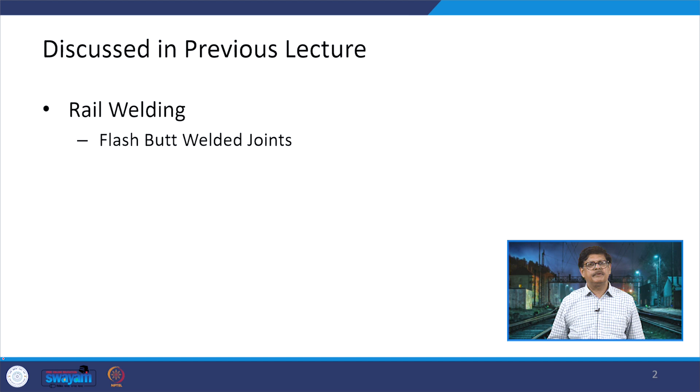Today when taking up the short welded rails, the points we are going to discuss are: components, the laying of SWR, gap survey which needs to be done, what type of maintenance is required, and what are the do's and don'ts when working with SWR for the staff taking care of these tracks.

Starting with the short welded rails. Short welded rail is a combination of 3 rails, welded together, which become 39 meters long. This is for broad gauge, considering a rail length of 13 meters.

So these 3 lengths which are used are welded together at these gaps, and that is how our SWR will be formed.

This SWR contracts and expands throughout its length. As soon as there is a temperature difference, whether positive or negative, it will cause expansion or contraction of this SWR track, and this happens between the joint placed here and the joint placed here. This joint can even be a fish plated joint, but when talking about this SWR, which is 3 panels taken together, all of this length is going to either expand or contract.

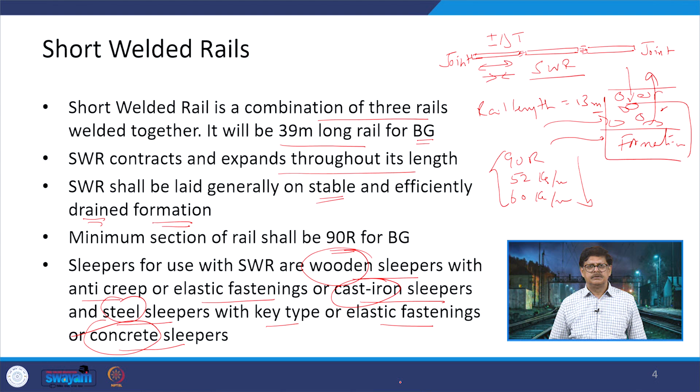But when using these particular sleepers, we need to be careful about the types of fastenings required to connect the rail with the sleeper. There can be some specific fastenings required, but the elastic fastening is one word which keeps repeating. These elastic fastenings have been used by Indian Railways for maybe 10 or 20 years now.

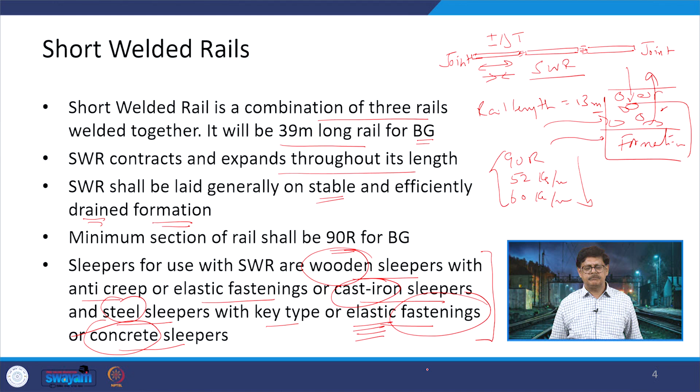So there is an applicability of SWR with different types of sleepers, and along with sleepers you have to find out what type of fastening has to be used.

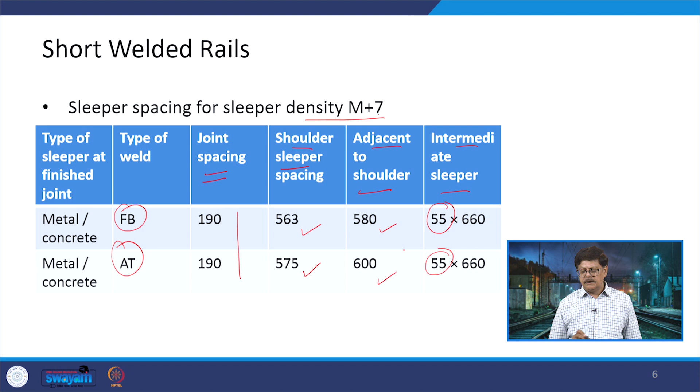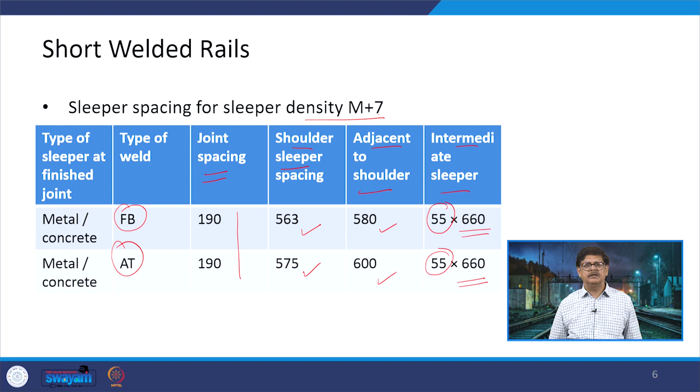The number of sleepers used, since now it is M plus 7, has increased to 55, and the intermediate sleepers have been placed at the same spacing of 660 mm. So, depending on the sleeper density, the number of sleepers will be decided, and then with respect to the joint sleeper, shoulder sleeper, adjacent to that, and intermediate, those distances or spacings will be defined. They are clearly enumerated in the Indian Railways guidelines.

Now, to facilitate on-track tamping, which is part of maintenance as well as making a new track, it is desirable to have continuous stretches with uniform sleeper spacing. Specifically when working with the tamping machine equipment, if uniform sleeper spacing has been provided, that helps a lot.

Another thing: the sleeper spacing at the joint is measured from the center of the joint to the center of the joint sleeper. I have already enumerated that in the diagram made in the previous slides.

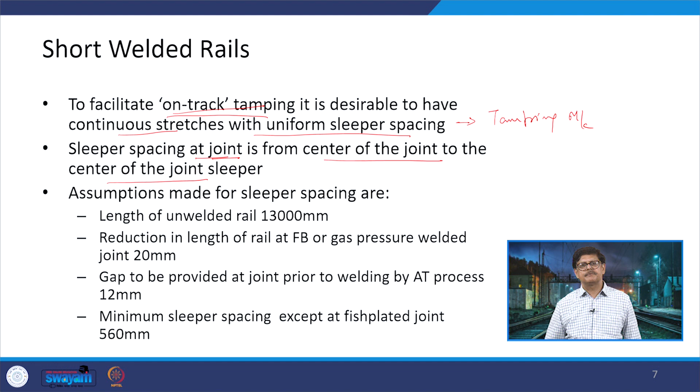Now, what are the assumptions made for the sleeper spacing here? First, the length of the unwelded rail is 13,000 mm, or simply 13 meters, when talking about broad gauge. That is our length, and that is why when we talked about SWR, which is a 3-panel system, that came out to be 39 meters.

Then, reduction in length of the rail at FB or gas pressure welded joint is 20 mm. Here this is where the flash butt or gas pressure welded joint is created. And the gap to be provided at the joint prior to welding, if using the AT process, is 12 mm, because there you have the material to be placed and the welding material to be added.

So there is a difference between the two: one weld is FB, another is AT. In FB the reduction that comes is 20 mm, and in the case of AT it is 12 mm. The minimum sleeper spacing, except at fish plated joints, is 560 mm. This minimum value is also defined here.

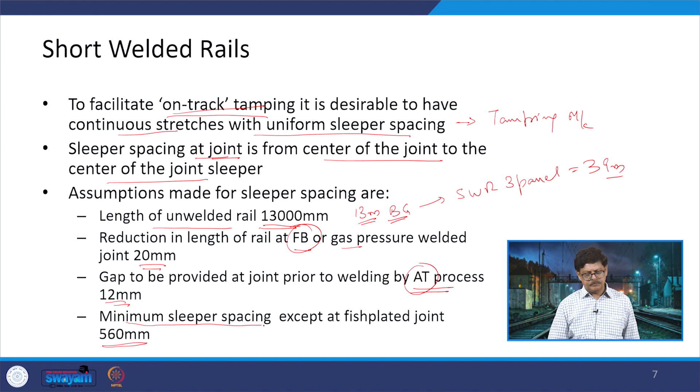Now we are talking about a curved section. If you recall, when we discussed the permanent way, a section was shown with sleepers provided, and on top of that the rails. There we talked about the cess, and in that cess we said that if it is a curved section, then on the outer side the cess distance, which we call d, will be increased by a certain amount, and those conditions were given there.

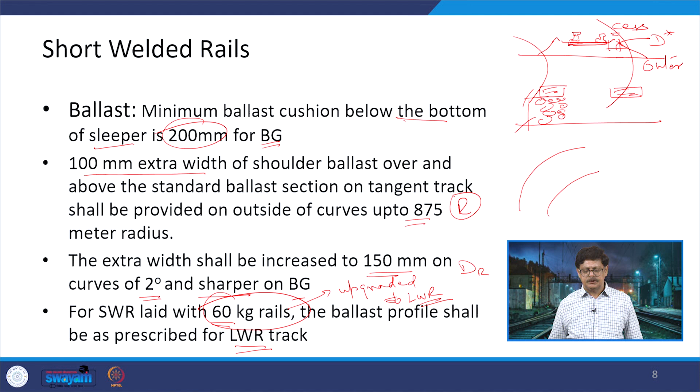Usually we work with 90 R and 52 kg per meter rail sections, but if 60 kg per meter rail section is used in SWR, the track detailing will be done to suit LWR. Because tomorrow, if we have already gone for a 60 kg rail, it can be upgraded to LWR. If that upgradation is required, we cannot remove the whole track and redo everything before operating trains. So it is better to adopt the LWR track detailing.

Now, talking about laying, the SWR on PSC concrete sleepers shall not be laid on curves sharper than 440 meter radius. This is one restriction - if the radius is less than 440 meters, SWR will not be used on top of PSC sleepers. You have to use some other sleeper in that case. As I reiterate, we moved from wooden to CI and steel, then finally to concrete, but there are certain conditions in which composite sleepers are used - meaning two different types of sleepers made of different material can also be used.

Now, this SWR butting against insulated joints, heel of crossing, and stock rail joints, shall be anchored for a length of 39 meters on the approach, effectively to arrest the creep in either direction. So this is another aspect.

When we discuss creep later, we will understand what this creep is and how it is arrested or controlled in a track. But in this case, if the SWR is butting against any insulated joints, or where crossing or stock rail joints are there - which we will discuss when talking about the crossing of two tracks - anchoring is to be used, done for a length of 39 meters on the approach, effectively to arrest the creep in either direction. 39 meters is basically one SWR panel length, which is anchored on either side.

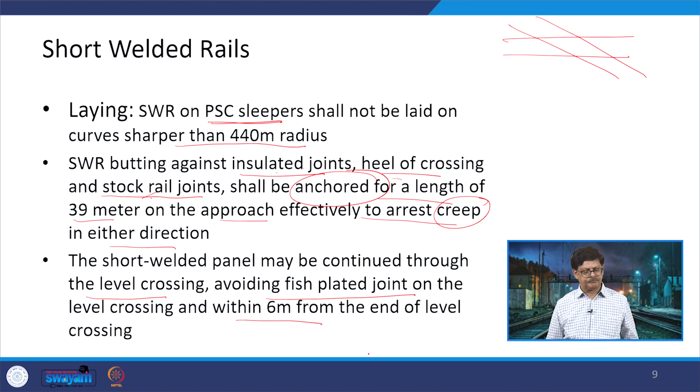Then the SWR may be continued over the girder bridges. Here also it is being allowed with unballasted decks, because you are on the girder bridges. So unballasted decks will be there, but up to 13.3 meter opening if the length of SWR is symmetrical to the center line of the bridge, and up to 6.1 meter opening if the length of the SWR is unsymmetrical to the center line of the bridge.

So you have a bridge at this position and SWR is being provided. If SWR is only here, this is not a symmetrical condition. If there is only one track, then there can be symmetrical condition. Say if there are two SWR tracks being provided, again it is a symmetrical condition. So looking at the conditions, these values have been given, whether up to 13.3 meter or 6.1 meter opening, this has to be done, and the center line of the bridge is being considered here.

Now, no fish plated joint should be located on the girder or within 6 meters from either abutment. So if in plan, or in elevation, there is an abutment being provided with respect to the location of this bridge, then within 6 meters on this side or the other side, no fish plated joint should be located. So this is another aspect, and we have discussed this aspect previously too.

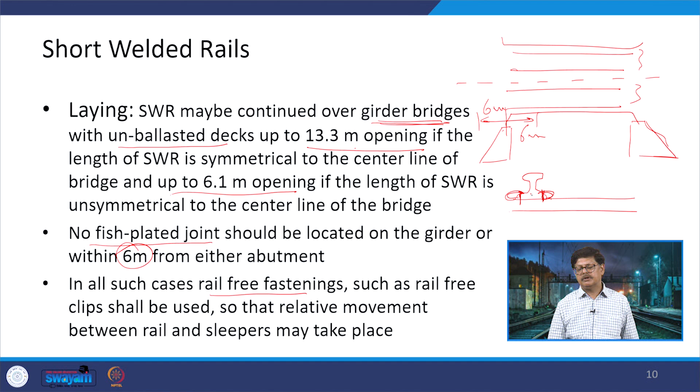In all such cases, rail free fastenings such as rail free clips shall be used, so that the relative movement between the rail and the sleepers may take place. So whatever the connection being provided between the rails and the sleeper, that connection here we are talking in terms of a rail free fastening, or the connection in terms of the clip being provided. These rail free fastenings will allow the relative movement, otherwise it will remain fixed and there will not be a relative movement as such.

The gaps which are to be provided for the SWR at the time of laying depend on the installation temperature Ti, where I is for installation, and the zone in which the rails are laid. There are 4 zones based on the temperature, from 1, 2, 3 and 4.

So we are talking about the installation temperature, that is the temperature at which the rails have been installed, with respect to the air temperatures and with respect to the stress free temperatures which otherwise can be there in the rails. Now this installation temperature Ti is the average rail temperature during the process of fastening the rails to the sleepers at the time of installation of SWR. So it is clearly defined here what exactly is Ti.

But then, because this fastening work is going on, it may be started in the morning and go up to late evening also, whatever temperature variations have been there, on the basis of that, the average rail temperature is to be calculated. So there are different ways in which the rail temperatures are measured, 3 or 4 such ways are there. We will be discussing those measurement techniques of the rail temperature afterwards.

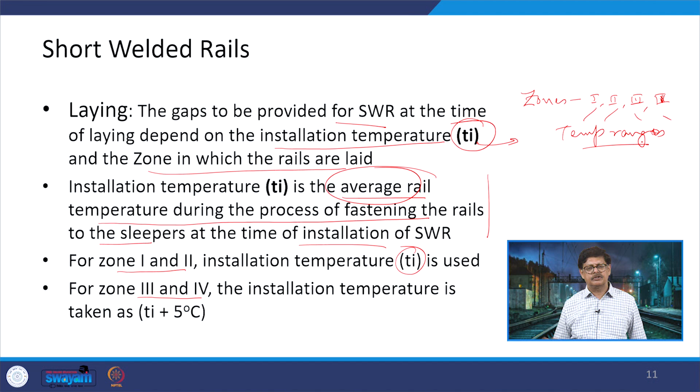Now, in the case of zone 1 and 2, the installation temperature is used as Ti. But if we are in zone 3 and 4, based on these zone 1, 2, 3, 4 being related with certain temperature ranges, which we will be looking at further as we go down with our discussion, here in the case of zone 3 and zone 4, the installation temperature is taken as 5 degrees centigrade extra with respect to the actual average rail temperature at the time installation is going on. So that is Ti plus 5 degrees centigrade, is the value which will be there.

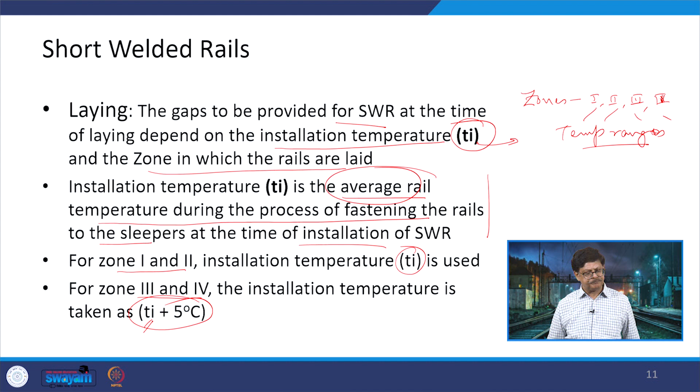Now in this particular slide, we are giving you the values with respect to the temperature and the gap. Here the installation of the rails is talked about for different rail temperatures, where the values have been given as Tm minus 17.5 degree to minus 12.6 degree centigrade, and similarly in the rest of the cases the values are changing and the temperature is increasing in this direction. Now this Tm is the mean average temperature of the rail sections.

Now in the case of zone 1 and 2, if we are using a 39 meter panel or a 26 meter rolled rail, that means they have been manufactured directly in the industry. 39 meter panel means it is a combination of 13 meter plus 13 meter plus 13 meter, so it can be SWR in that form. For those, the initial gaps are defined here in mm. The first value is related to the 39 meter panel and the second value is related to the 26 meter rolled rail section.

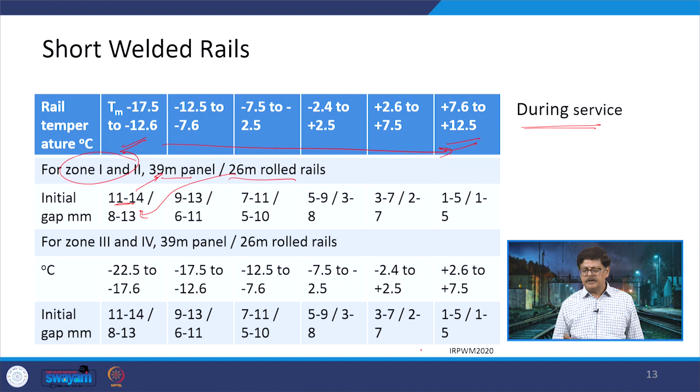So for a 39 meter panel, if the temperature is like minus 17.5 to minus 12.6 degree centigrade as a mean rail temperature, then the initial gap is 11 to 14, whereas for 26 meter rolled section it is 8 to 13. And when you come to the highest category where the temperatures are now plus 7.6 to 12.5, there the values range from 1 to 5 in the case of 39 meter panel as well as in the case of 26 meter rolled section.

Now if we shift from zone 1 and 2 to zone 3 and 4, for the same two conditions of the two types of rail sections which can be there, 39 meters and 26 meters, again for the given temperature ranges which go one down, as you see here as well as here, the initial gap in mm that is specified is again the same as being used above.

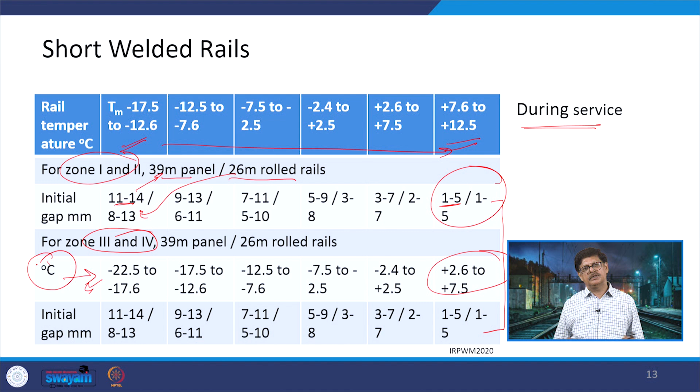So the initial gap values are not changing, the length of the panel is not changing. Only change is that with respect to zone 1, 2 or zone 3 and 4, the temperature, the rail temperature range is changing, and that is where the decision has to be taken.

Now coming to the gap survey, the gap survey means we are talking about a gap which is available in between the two rails which are being welded or going to be welded. So it is required at locations where the track develops excessive creep or jammed joints or sun kinks or wide gaps, misalignment, battered and hogged rails, or fractures at the joints, or bending of the bolts. So what we are talking in all of these cases is there is some sort of a distress which has got induced in the track.

So if we are talking about a rail section and the delta T is positive here, there is going to be a movement of this rail. And when this movement happens and there is another rail which is being placed here and these two are being jointed together, maybe either by a fish plate and the fish bolts and nuts, or as a welded condition. So here, in the case of it being provided with a fish plate and the fish bolt, this rail end will also be moving because of this temperature of delta T.

And if both of these move, there is a possibility that it comes to a condition like this, and then there is going to be a jam condition of this joint. If it is a negative delta T and the movement is in the backward direction, then this joint will open up. So there are two things which may happen in this form.

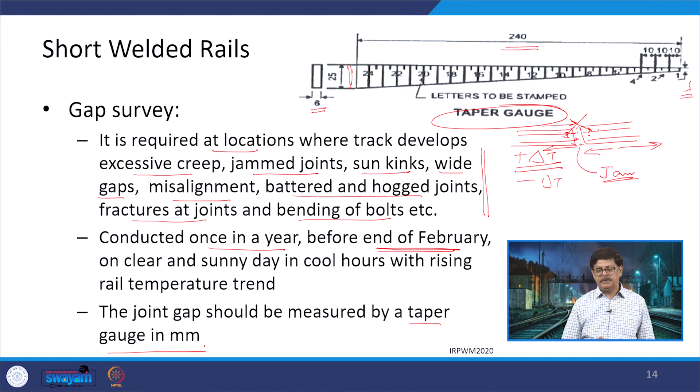Now, conversion of SWR into LWR. We talked about it - if you are going for a ballast section and heavy rail sections have been used, say 60 kg per meter, then it is better that we provide that ballast section with the specifications of LWR track. So this is the conversion we are looking at here.

What are the precautions needed when converting a gauge from SWR to LWR? The anticipated residual life shall be at least 10 years - meaning the new maintenance requirement should not come before 10 years. At least for 10 years the track should work and operate without any problem.

Ultrasonic test, USFD, has to be done, and all defective rails shall be replaced before the conversion is done. We talked about those things - there can be corrosion, flaws, other defects or wear, or internal cracks in the rail sections. Everything has to be detected, and if observed, it has to be replaced.

It should not be used when going for a conversion. Then rail ends which are hogged or battered, or rail ends having a history of cracks in the bolt hole region because of excessive stresses coming at that point, shall be cropped before the conversion into LWR. We did talk about this.

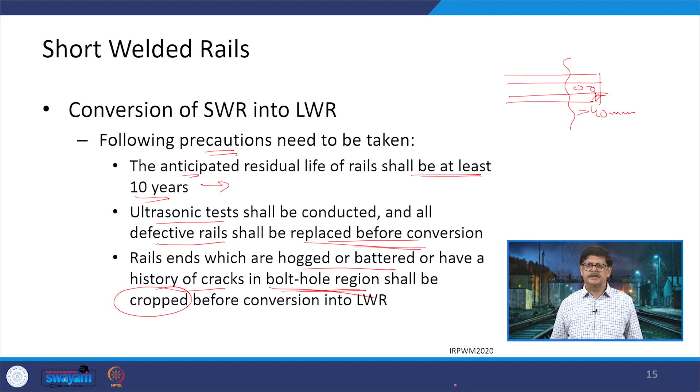Then, maintenance of SWR. Regular track maintenance operations like packing, lifting, aligning, local adjustments on curves, and screening of ballast - because over the years the ballast has been taking loads, may have broken, or there has been more production of fines because of abrasion or attrition, whatever is taking place.

So screening of ballast may be required - other than deep screening, we are not talking about the total material being taken up. A scattered renewal of sleepers at only those locations where one or two sleepers have been found needing change can be done.

These may be carried out without restrictions when the rail temperature is below Tm plus 25 degree centigrade in the case of zone 1 and 2, and Tm plus 20 degree centigrade in the case of zone 3 and 4. Tm, as I have already specified, is the average mean temperature of the rail sections considered over the years.

This is one range which needs to be considered for regular maintenance operations. In the case of curves of less than 875 meter radius on broad gauge, or if there is a yielding formation, the temperature limits for zone 1 and 2, and zone 3 and 4, may be revised as Tm plus 15 degree centigrade and Tm plus 10 degree centigrade instead of 25 and 20 degree centigrade respectively for the two zone categories.

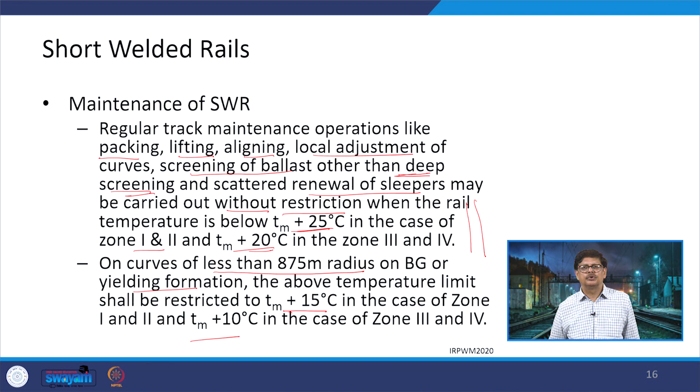Now coming to the maintenance of SWR, if the temperature is higher than the specified values, not more than 30 sleeper spaces in one continuous stretch shall be opened. That means at one particular time only 30 sleepers shall be taken out and opened, and before the end of the day it should be ensured that the ballast is boxed up, meaning every work is completed.

But if there is a requirement of a major lifting or major alignment of track, or deep screening or renewal of sleepers, then again the temperature of Tm plus 15 or Tm plus 10 degree centigrade is to be considered for zone 1 and 2, and 3 and 4 respectively.

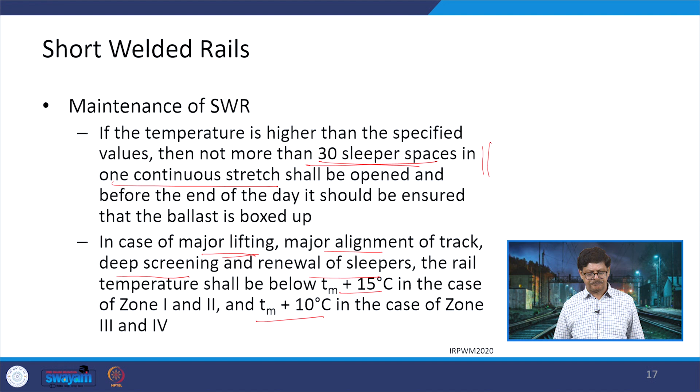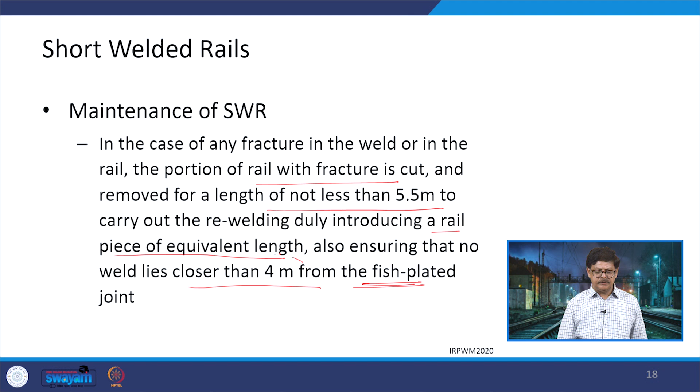In the case of fracture in the weld or rail, the portion of rail with fracture is cut and removed for a length not less than 5.5 meter to carry out rewelding, duly introducing a rail piece of equivalent length. So we cut a length of 5.5 meter and more, and put in a rail section of the same size, which is a better rail section, and rewelding is done. We also ensure no weld lies closer than 4 meter from the fish plated joint, meaning the weld joint and the fish plated joint should not come very near to each other. That limit is defined as 4 meter.

Now, there are some do's and don'ts for the staff maintaining the SWR. First, treat SWR as important as LWR. Ensure correct gaps in the fish plated joints. Conduct gap survey using the taper gauge, as discussed. Ballast cushion shall be maintained, and if there are any deficiencies, then screening etc. should be done to remove those deficiencies.

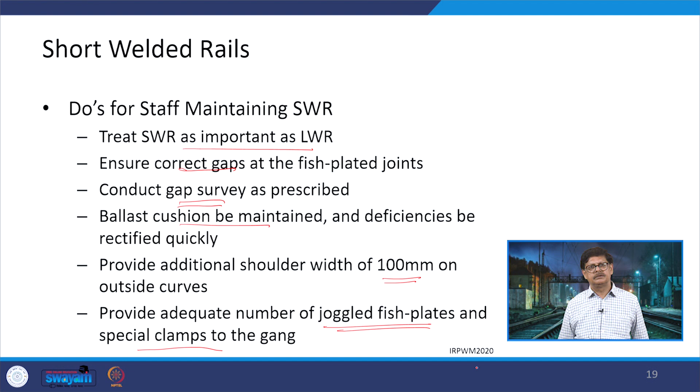Provide additional shoulder width of 100 mm outside the curves—that is 100 or 150 mm depending on whether we are talking about sharper curves or others, as discussed earlier. Provide adequate number of joggled fish plates and special clamps to the gang which is moving to check the track, so that as soon as they find a problem, they are able to change that.

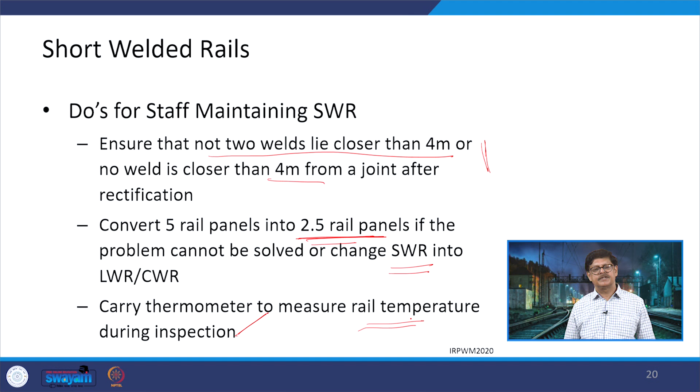Ensure that no weld is closer than 4 meter from the joint after rectification—this is also important. Convert the 5 rail panels into 2.5 rail panels if there is a problem we have not been able to solve, or otherwise it is better to change SWR into LWR. And carry a thermometer to measure rail temperature during inspection, and that record has to be maintained. This is also an important aspect for the staff moving to check the SWR.

Talking about the don'ts: the deficiency of any fastening or fitting shall not be left unattended. It has to be taken care of as early as possible.

In the case of curves with radius less than 875 meters on broad gauge, or in yielding formations, continuous maintenance shall not be done if the rail temperature reaches Tm plus 15 in the case of zone 1 and 2, and Tm plus 10 in the case of zone 3 and 4. If the rail temperature has reached this, we have to stop our maintenance work and wait.

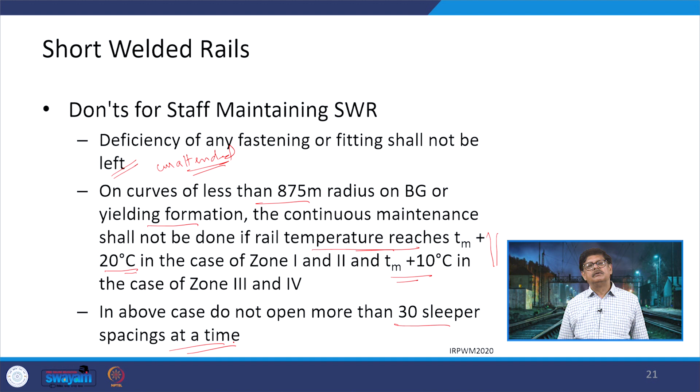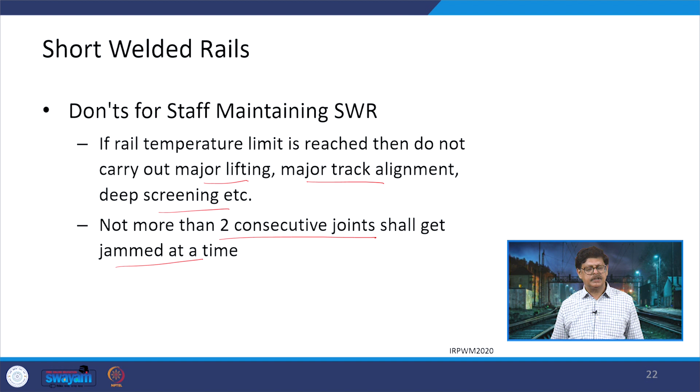And in the above cases, do not open more than 30 sleepers at a time. If a rail temperature limit is reached, do not carry out major lifting, major track alignment, deep screening etc., and not more than 2 consecutive joints shall get jammed at any point of time—meaning one joint and the other joint should not both get jammed. These are the don'ts for the staff maintaining the SWR, and they have to take care of all of these things.

With this, we close our discussion now. We have discussed short welded rails—their definitions, requirements with respect to the various components of the track, the laying of SWR, the gap surveys and various tolerances related to that, the maintenance, and the do's and don'ts for the maintenance staff. Thank you. We will be meeting in the next lecture.